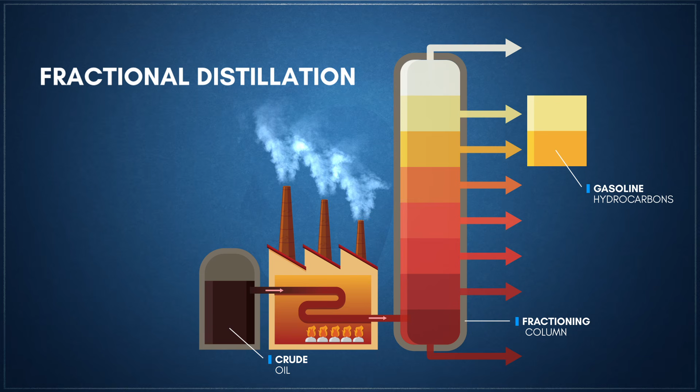In fact, the term gasoline was initially coined to describe distillate oils that vaporize into a gas easily. The term would soon find itself being used as a generic description for any volatile lighting oils. Both cazoline and gasoline were even contended trademarks for such products in the 1860s.

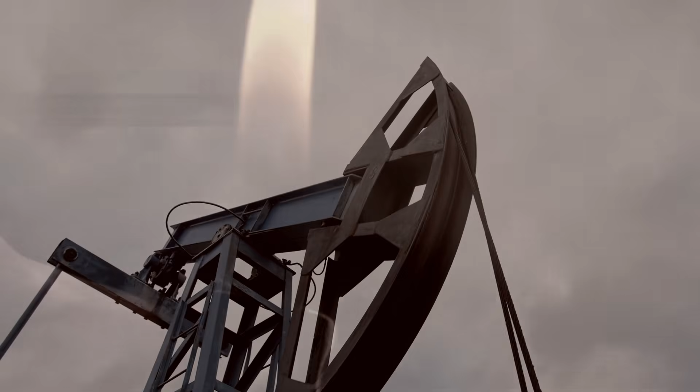Within a decade, the term petrol, short for refined petroleum, began to grow in popularity in British Commonwealth countries, with its first description in print as the material employed to run engines appearing in 1895.

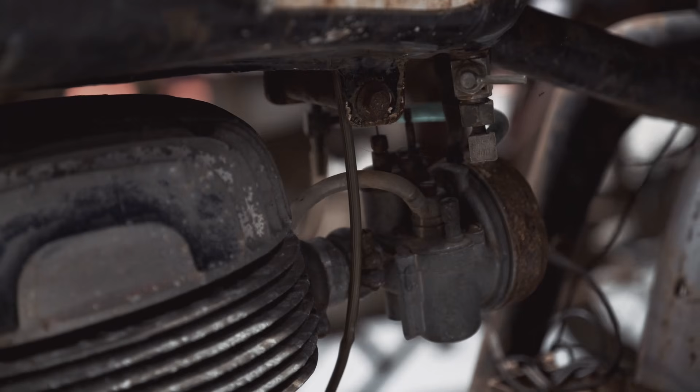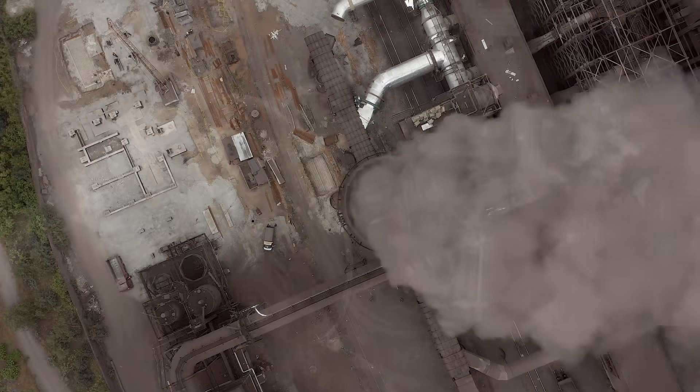In the 1880s, the development and subsequent success of the Otto cycle engine directly led to a demand for a volatile fuel source that could power them practically. Initially, coal gas, a gaseous mixture composed of hydrogen, methane, and carbon monoxide, produced by the continuous heating of coal in the absence of air, was used as a fuel source for early designs, though these engines would quickly be adapted to a more practical liquid fuel source using a carburetor.

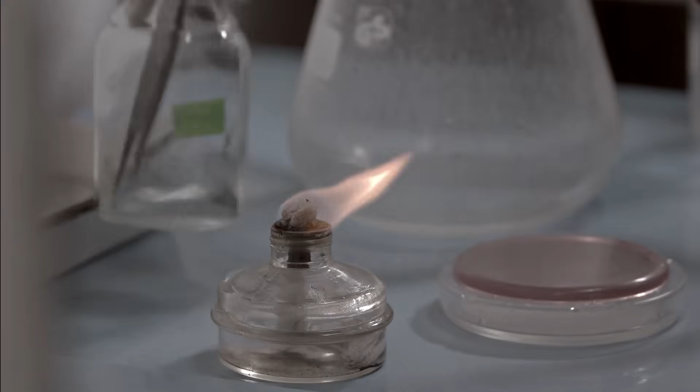These early surface carburetors relied on evaporation from the surface of the liquid fuel to form a combustible mixture with incoming air. For this to work efficiently, a volatile hydrocarbon fuel that would vaporize around the operating temperatures of the engine was needed. Gasoline would prove to be the ideal fuel for this.

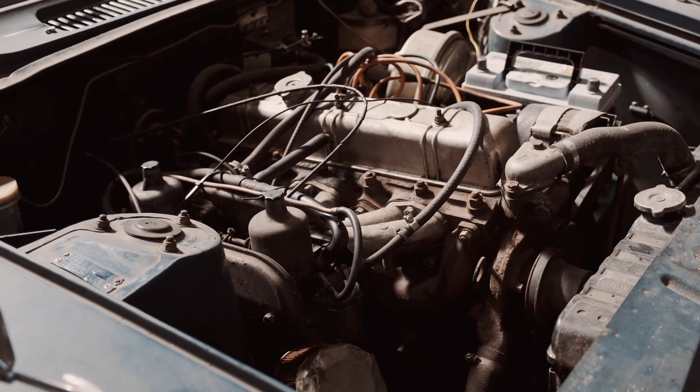By the 1890s, the introduction of the float-fed carburetor design, which used an atomizer nozzle, allowed for even more fueling flexibility. This made these engines far more reliable and robust, as they could now easily run on the loosely defined composition of early gasoline. Now intertwined with the success of the Otto cycle engine, this once useless byproduct of oil refining would now experience a huge surge in demand as the internal combustion engine became a foundational element of 20th century technological development.

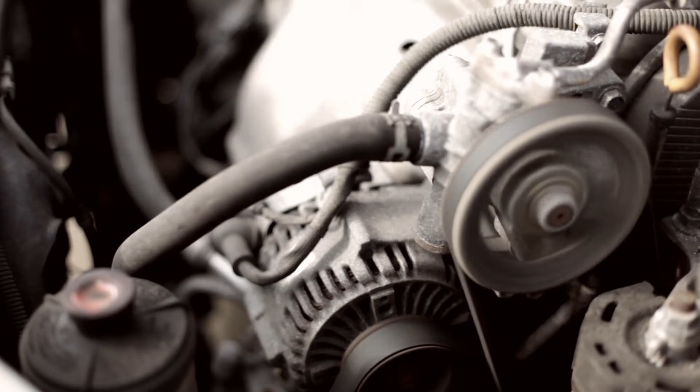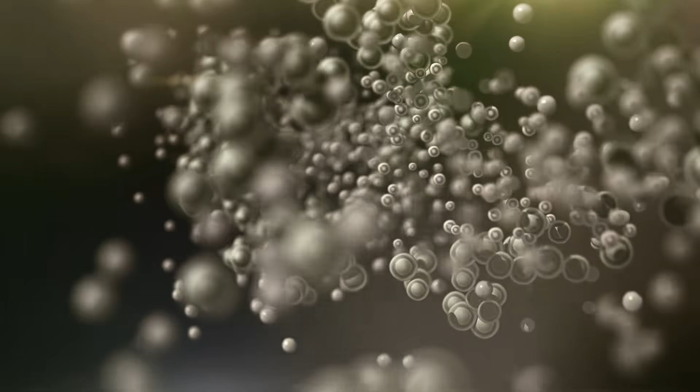Despite its public perception, gasoline is not a clearly defined compound, but rather a homogenous blend of light to medium molecular weight hydrocarbons, ranging from 4 to 12 carbon atoms per molecule. Its definition comes from its properties as a fuel, and its exact composition can vary based on the region of use, feedstock, and the processes used to create it.

The hydrocarbon types that commonly combine to form gasoline and contribute to its properties as a fuel are paraffins, olefins, naphthenes, and aromatics.

Paraffins, also known as alkanes, are the most prevalent hydrocarbons in gasoline. Alkanes are saturated hydrocarbons, meaning they do not have any double or triple bonds, and they contain relatively large reserves of energy. Examples of paraffins in gasoline are butane, pentane, and hexane.

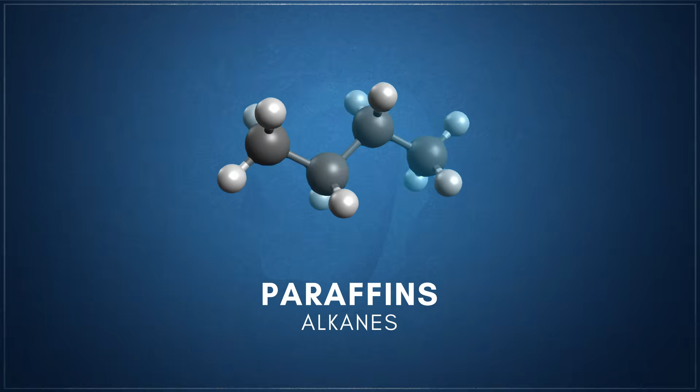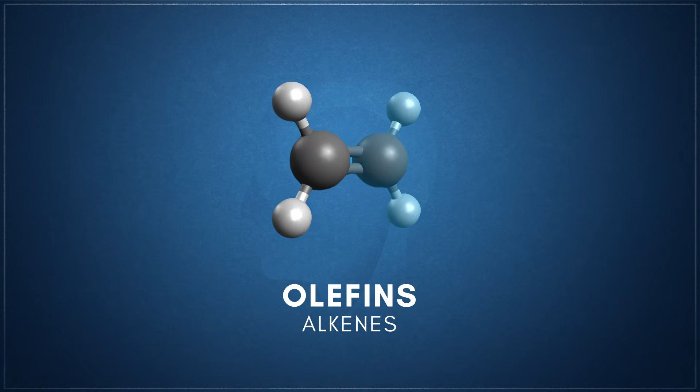Olefins, also known as alkenes, are hydrocarbons that contain at least one carbon-carbon double bond and are unsaturated, meaning they can react with other chemicals to form new compounds. Examples of olefins commonly found in gasoline include ethylene and propylene.

Naphthenes, also known as cycloalkanes, are hydrocarbons that contain one or more cycloalkane ring and are saturated.

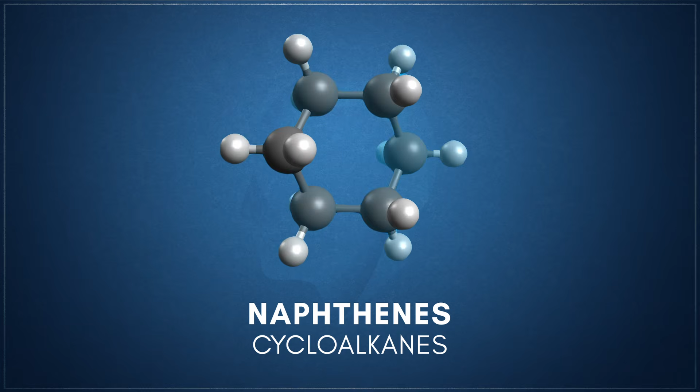Saturated hydrocarbons tend to be relatively inert and do not undergo additional reactions easily. Aromatics are unsaturated hydrocarbons that contain one or more aromatic rings, which are six-membered carbon rings with alternating double bonds. Common examples of aromatics found in gasoline include benzene, toluene, and xylene.

The relative proportions of these different types of hydrocarbons in gasoline have a significant impact on its properties, with octane rating and energy content being two key metrics. Depending on the blend, gasoline can vary anywhere from 32 to 36 megajoules per liter, with an octane rating that can vary from unusable for engine use to ratings designed for high compression performance and aviation engines.

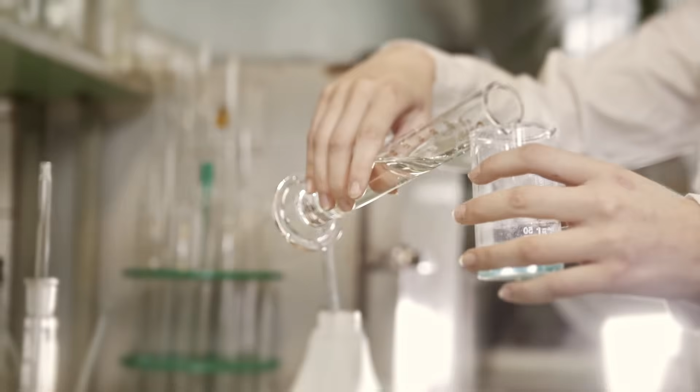Octane rating is a measure of a fuel's ability to resist knocking or pinging during combustion. This phenomenon is caused by the air-fuel mixture detonating prematurely within the engine and can cause engine damage, reduced power output, and increased emissions. This measurement system was originally developed based on the properties of isooctane, a hydrocarbon compound that is very resistant to knocking. Isooctane was assigned a rating of 100 as it provided the highest known level of knock resistance at the time.

Modern octane ratings are typically expressed in one of two forms: research octane number, or RON, and motor octane number, or MON. RON is a measure of a fuel's ability to resist knocking under mild driving conditions, while MON measures its resistance to knocking under more severe conditions, such as high engine speeds and loads. The two numbers are averaged to give the fuel's anti-knock index, or AKI, also known as the pump octane number, or PON, which is the number typically displayed on fuel pumps in the United States.

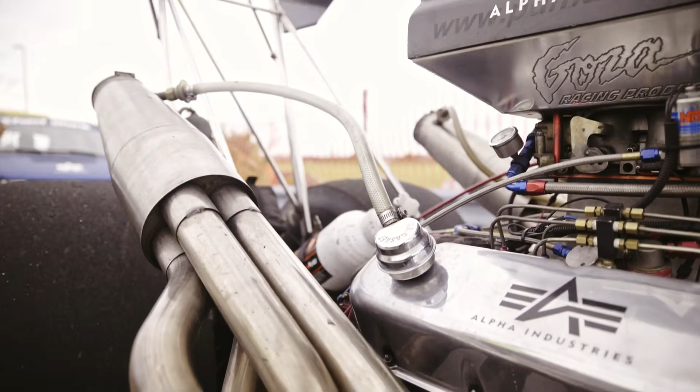The higher the octane rating, the more resistant the fuel is to knocking. Fuels with octane ratings as high as 115 to 150 MON are typically used in high-performance engines or engines with higher compression ratios, such as in aviation where the risk of knocking is greater.

Early gasoline produced directly from distillation was known as straight-run gasoline. Its composition varied wildly as the mixtures and ratios of the hydrocarbon blend produced was often unknown and highly dependent on the source of the crude oil and the specifics of the refining process used.

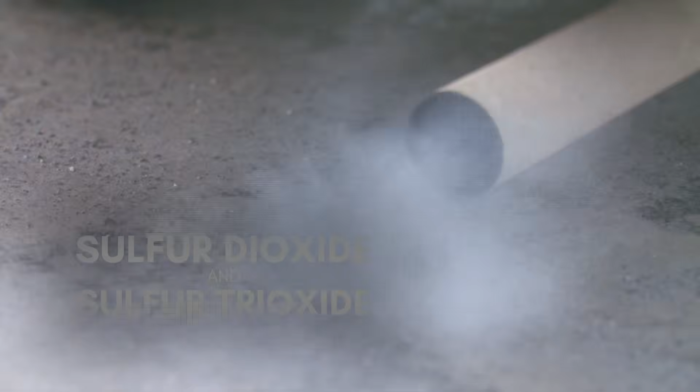These fuels were characterized by their higher proportion of naphthenes over other hydrocarbons, as well as higher amounts of sulfur and nitrogen. When gasoline containing sulfur is burned, it forms sulfur dioxide and sulfur trioxide, which creates deposits within an engine and are major contributors to air pollution, while the nitrogen-containing compounds produce nitrogen oxides when combusted, which are a major contributor to smog, acid rain, and ground-level ozone.

At the time, the effects of abnormal combustion and engine knock resistance were not yet established. A fuel's volatility via its boiling point was used as the primary metric of its performance. Early fuels that had relatively higher boiling points and overall lower volatility were known as high-test gasoline and were primarily used on aircraft engines.

These early gasoline blends by today's standards would be unusable in the higher compression engines of today, as even the most high-test blends would have an octane rating below 70, with lesser quality blends going as low as 40. By 1910, the rising demand for automobiles combined with the expansion of electrification created a flip in the product demands of the petroleum industry, with the need for gasoline now beginning to supersede that of kerosene.

In response to this supply problem, the industry looked to a technique known as thermal cracking to increase the yield of gasoline from the heavier hydrocarbons.

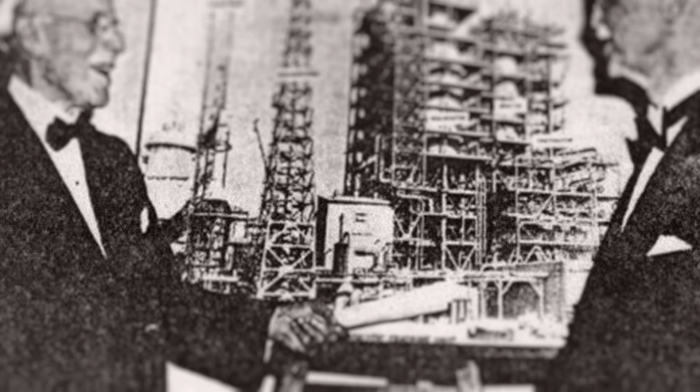First conceived by Russian engineers Vladimir Shukhov and Sergei Gavrilov in 1891, a variant of the technique would be developed by American engineers William Marion Burton and Robert E. Humphreys in 1908. Coined the Burton process, this technique thermally decomposed straight-run gasoline and heavier oils at temperatures between 370 and 400 degrees Celsius, or 700 to 750 degrees Fahrenheit, and under a pressure of around 620 kilopascals, or around 90 psi, cracking the heavier hydrocarbons and depleting their hydrogen to produce more lighter, hydrogen-rich hydrocarbons.

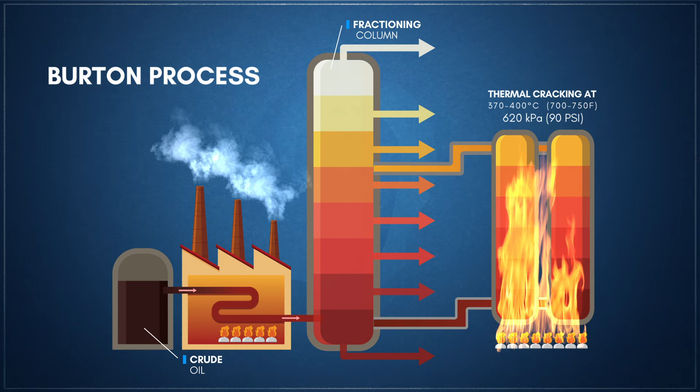This enabled refiners to produce cracked naphthas and other light oil products, which overall reduced the proportion of heavy oil produced during refining. As the First World War raged on, a troublesome issue emerged with the usage of gasoline in aviation.

The broad range of fuel volatility and octane ratings available posed a significant threat to aircraft engines, as they would produce unpredictable levels of power, risking the safety of early, power-sensitive planes during takeoff. Adding to this danger was the unavailability of consistent high-octane fuel, which limited engines to heavier, lower compression designs.

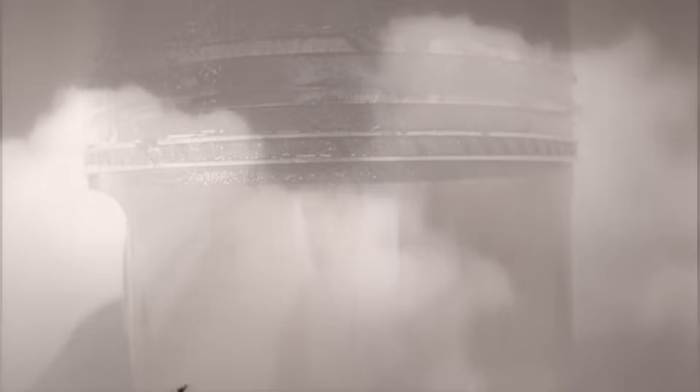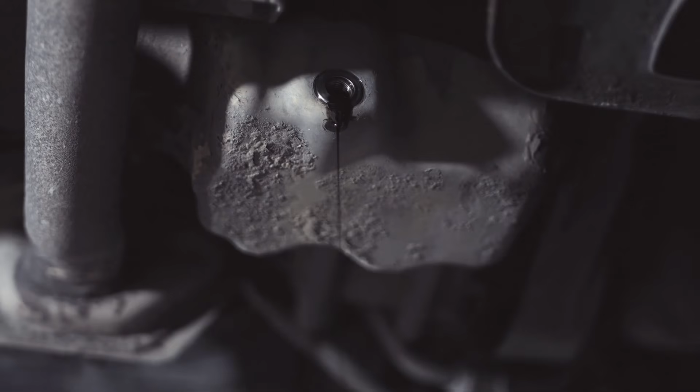The instability of fuel was also a concern, as the higher levels of unsaturated hydrocarbons produced by thermal cracking were reactive and prone to combining with impurities, resulting in gumming, further exacerbating the problem. Spark plug fouling and oil dilution was also occurring with thermally cracked gasoline due to volatility inconsistencies.

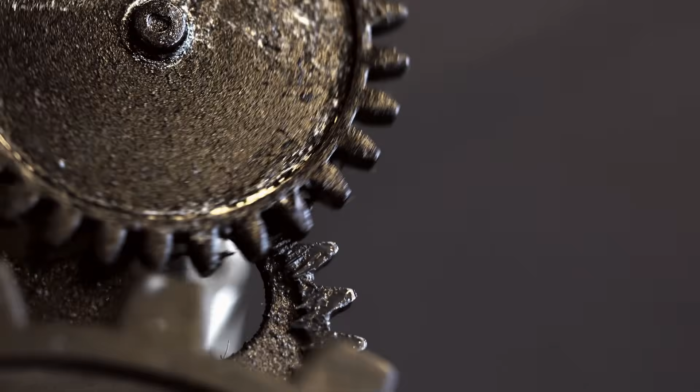This prompted the US Army to conduct research on gasoline properties and its effect on performance, with the results leading to the first US government specifications to be published for gasoline in 1922.

Designated as fighting and domestic grades for aviation and motor grades for automobiles, these specifications defined fuel grades by their boiling points, color, sulfur content, and susceptibility to gum formation.

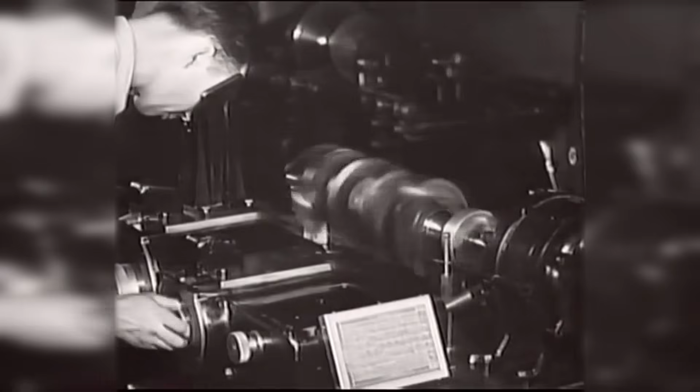Around this time, the automotive industry was increasingly growing dissatisfied with the oil industry's quality issues and began to conduct their own research into the effects of thermally cracked gasoline on abnormal combustion.

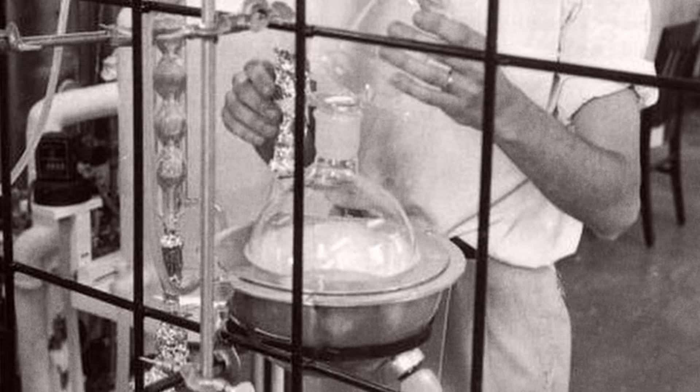In 1921, Charles F. Kettering of General Motors, upon investigating additives to improve fuel performance, ultimately looked towards tetraethyl lead as the solution. Tetraethyl lead was the product of research previously conducted by engineers Thomas Midgley Jr. and Thomas Boyd on abnormal combustion, and it would become the defining component of leaded gasoline.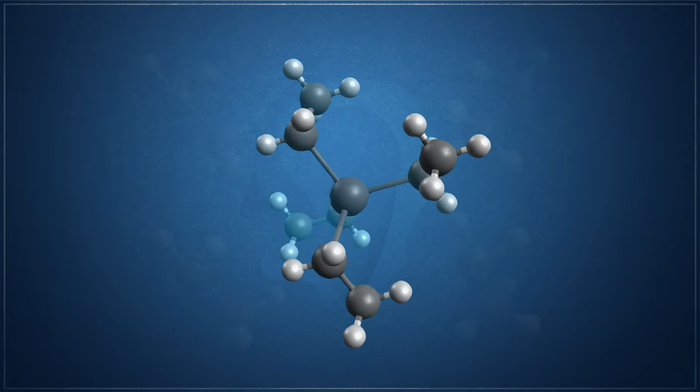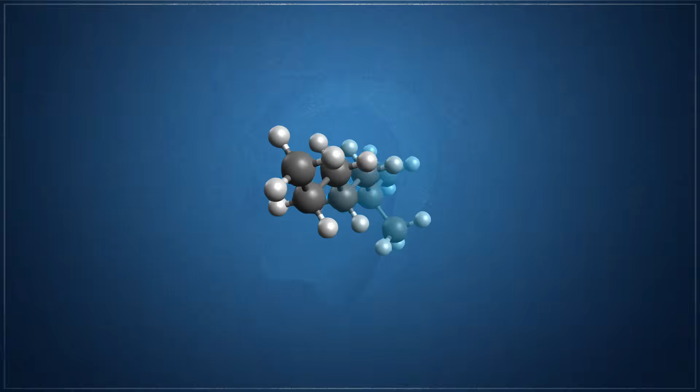When tetraethyl lead is added to gasoline, it dissociates into its component parts of lead ions and ethyl radicals. These ethyl radicals react with other gasoline molecules to form branched chain hydrocarbons that have a higher resistance to combust prematurely under pressure, effectively increasing the octane rating of the gasoline.

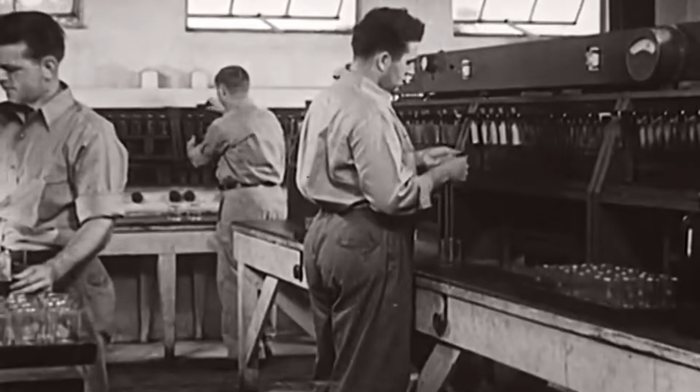Despite warnings about the dangers of leaded compounds, Kettering secured a patent for tetraethyl lead and would promote it. Even amid instances of lead poisoning among workers in production plants and a ban on sales in several areas, flawed industry-funded studies claiming that leaded gasoline was not a public health issue and was the only viable additive that prevented engine knocking without affecting fuel economy removed the barriers to its eventual mass adoption by the 1930s.

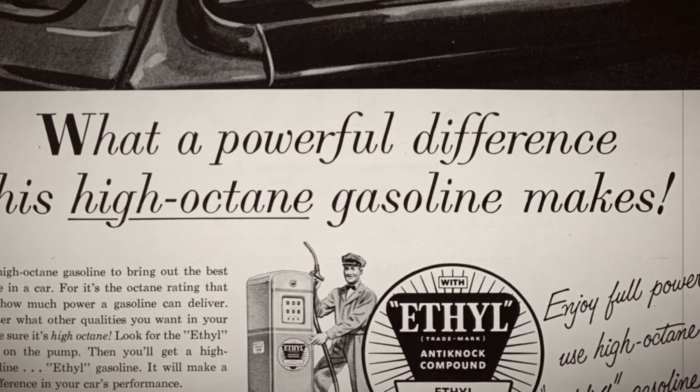In the early 1920s, Almer McAfee of the Gulf Refining Company would develop a new refining process that could potentially triple the gasoline yielded from crude oil by existing distillation methods.

Known as catalytic cracking, the process heats heavy hydrocarbon feedstock to a high temperature along with a catalyst in a reactor. The catalyst initiates a series of chemical reactions that break the hydrocarbon molecules apart into smaller fragments that are then further cracked and recombined to produce lighter, more desired hydrocarbons for gasoline.

Initially, the McAfee cracking process required anhydrous aluminum chloride, which proved to be prohibitively expensive for widespread use. By the early 1930s, French mechanical engineer Eugene Jules Houdry, backed by the Sun Oil Company, known today as Sunoco, would begin his own research into a commercially viable catalytic cracking process. In 1938, the Houdry process would be publicly introduced.

The Houdry process uses a fixed bed reactor filled with small beads of a catalyst, typically made of alumina or silica alumina. The heavy hydrocarbon feedstock is mixed with steam and passed over the catalyst bed at a temperature of around 538 degrees Celsius, or about 1,000 degrees Fahrenheit.

The high temperature and pressure causes the hydrocarbon molecules to break apart into smaller fragments, which then react with each other to form lighter hydrocarbons suitable for gasoline.

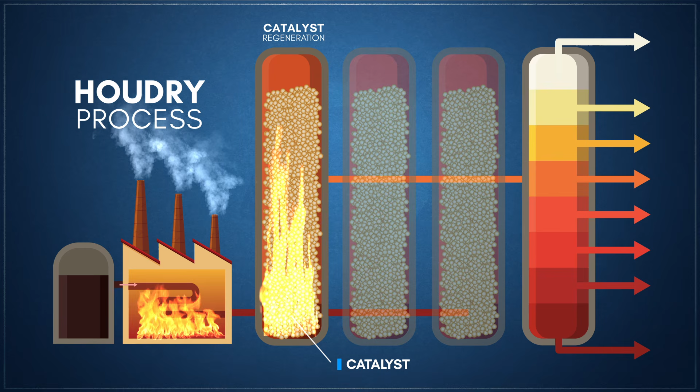Initially, the Houdry process operated in batches where refining and regeneration alternated. However, a technique called thermofor catalytic cracking would be developed that used a bucket conveyor elevator to move the catalyst from the regeneration kiln to the separate reactor section, creating a continuous operation.

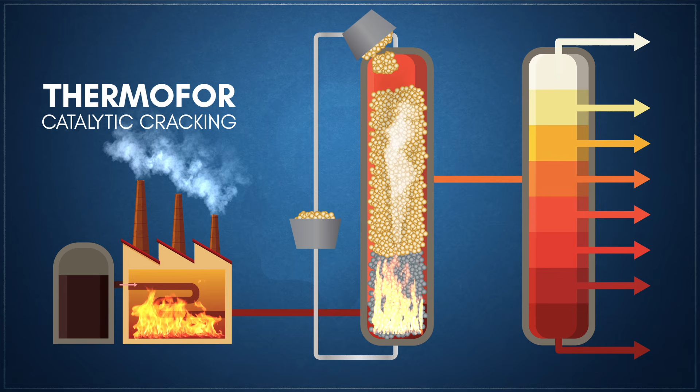Catalytic cracked gasoline had a significantly lower olefin content and more branched chain and aromatic hydrocarbons than thermally cracked gasoline, which raised its octane rating. The catalyzing action also produced a fuel with lower sulfur and nitrogen content.

The advent of catalytic cracking rendered thermal cracking obsolete, and over the next few decades, it would be completely phased out as a primary process.

It's speculated that the combination of the larger yield of the Houdry process, along with the higher octane ratings created by tetraethyl lead, were key factors in the winning of World War II, especially when it came to fueling the higher power aircraft engines towards the later years of the war.

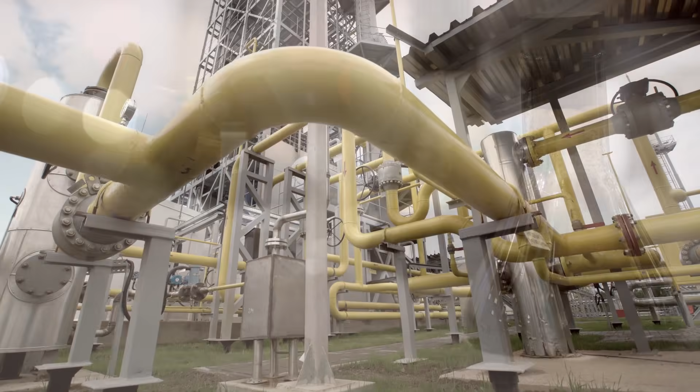In an attempt to circumvent Houdry's patents, Standard Oil began researching an alternative method to catalytic cracking, resulting in the development and fielding of the fluid-based catalytic cracking process in the early 1940s.

Initially conceived by Warren K. Lewis and Edwin R. Gilliland at the Massachusetts Institute of Technology, fluid catalytic cracking used a catalyst suspended in the form of fine particles within the reactor to improve the efficiency and effectiveness of the cracking process.

As the catalyst became deactivated by the buildup of carbon deposits caused by the cracking process, the spent catalyst is separated from the cracked hydrocarbon products and sent to a regeneration unit where the contaminants are burnt off, and the catalyst is reactivated for reuse. Fluid catalytic cracking allowed for better control over the reaction and produced a more consistent, higher yield of gasoline.

It was also continuous in nature and relatively easy to maintain. This efficiency and versatility would lead to fluid catalytic cracking becoming one of the most popular oil refining processes used today.

By the 1950s, as automobile engines continued to develop and become more powerful, the demand for higher octane gasoline grew. High quality control of gasoline production combined with an increase in the use of tetraethyl lead brought typical octane ratings up to around 70 to 80 RON, with premium grades reaching 90 to 95 RON or even higher in some cases. Additionally, the petroleum industry saw significant advances in catalytic reforming technologies that were first commercialized in the 1940s for increasing the octane rating of gasoline.

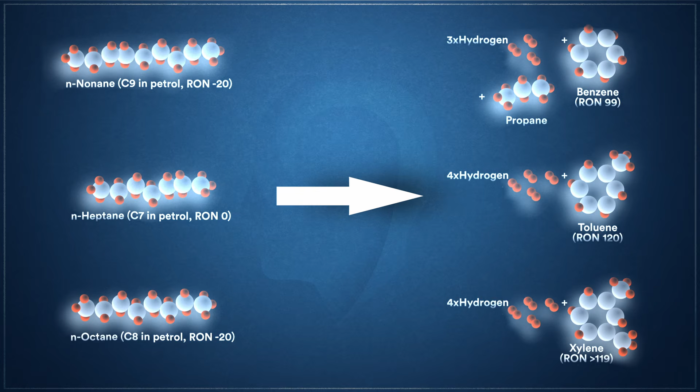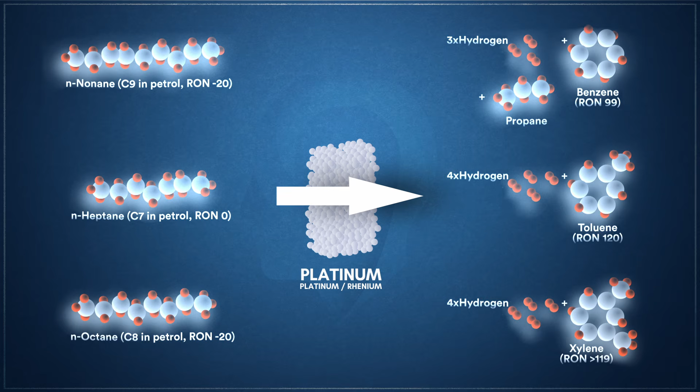Catalytic reforming works by converting low-octane naphtha into high-octane aromatic compounds such as benzene, toluene, and xylenes through the use of a catalyst, typically platinum or a platinum-rhenium combination, at elevated temperatures and pressures. The resultant reformate is then used as a blending component in gasoline to boost its octane rating.

The 1950s also saw the military's transition from piston to jet aircraft, reducing its demand for high-octane aviation gasoline in favor of kerosene-based jet fuels, realigning the focus of gasoline refining research to a much larger commercial scope.

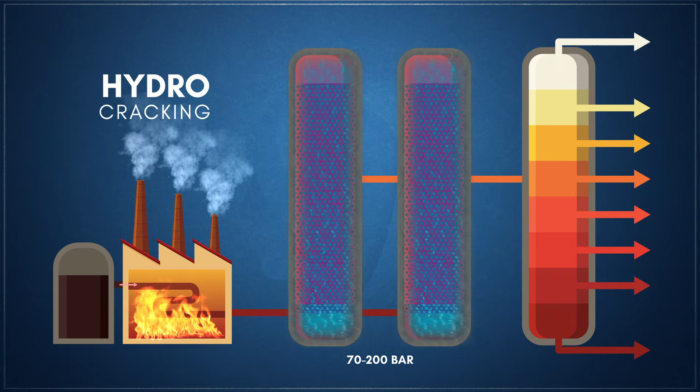During this time period, a new type of catalytic cracking process based on decades of research on hydrogenation, a reaction where hydrogen was used to break down large hydrocarbon molecules into smaller ones while adding hydrogen atoms to the resulting molecules, emerged. This research would yield a process known as hydrocracking, a technique that combines hydrogen and a catalyst under high pressure, usually between 70 to 200 bar, and high temperatures in the presence of hydrogen gas to break down large hydrocarbon molecules into smaller, more desirable ones.

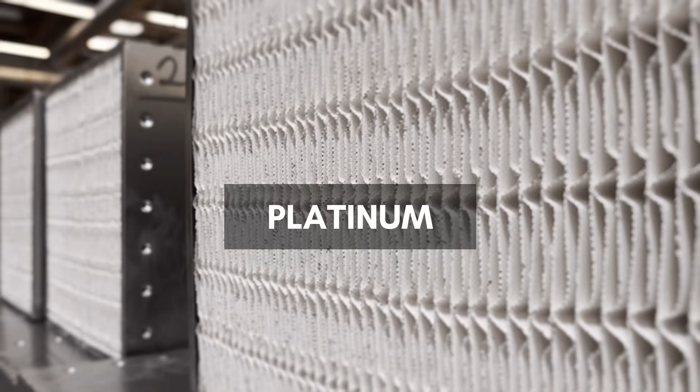The breakthrough that made this possible was the development of catalysts composed of metals like platinum, palladium, nickel, and molybdenum, supported on a solid material like alumina or silica, that made the process viable.

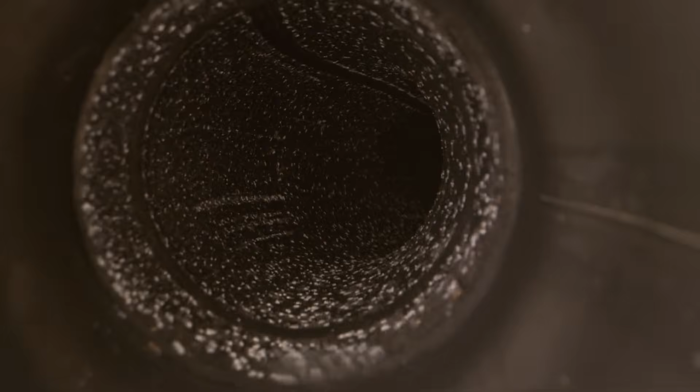Hydrocracking produced high-quality, cleaner-burning fuels with low sulfur and nitrogen content. It was very flexible, allowing for variations in the operating conditions and catalysts, while producing a high yield of gasoline from a wide range of feedstocks, including heavy oils and residues from other refining processes. Its efficiency at producing higher yields of gasoline from heavier oil products led to it being adopted on a commercial scale by refineries around the world during the 1960s.

Since its commercial adoption in the 1920s, the harmful effects of lead exposure from gasoline were becoming apparent, with studies linking atmospheric lead emissions to various health problems, including neurological damage, particularly in children. However, by 1970, the United States Environmental Protection Agency would be established, with one of its first tasks being to address the growing concerns about lead pollution.

That year, the second of two acts that formed the Clean Air Act would be passed, giving the EPA authority to regulate the use of lead additives in gasoline.

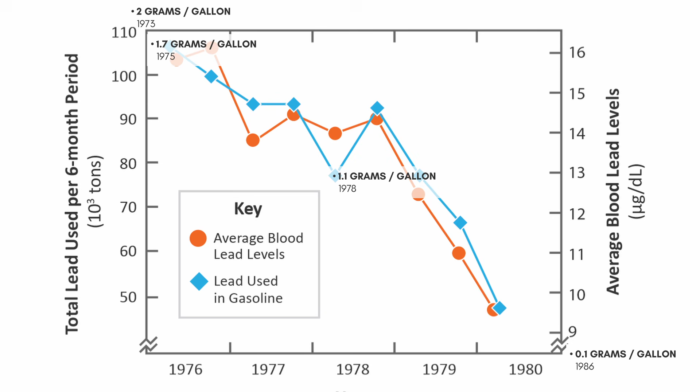Within 3 years, the EPA would introduce regulations to gradually reduce the amount of lead in gasoline in a phase-down process that started with a reduction of lead content to 2 grams per gallon in 1973, followed by further reductions to 1.7 grams per gallon in 1975, 1.1 grams per gallon in 1978, and finally 0.1 grams per gallon in 1986 for on-road vehicles. By the 1990s, the sale of leaded gasoline for road vehicles was effectively banned in the United States, with only a few exceptions for off-road use and aviation gasoline, though at only 0.05 grams per gallon.

Following the US's lead, many countries around the world implemented their own regulations to phase out leaded gasoline, and by the early 2000s, leaded gasoline was virtually eliminated in most developed countries. By 2021, Algeria, the last remaining country to use leaded gasoline, would end its use, finally completing the global elimination of leaded gasoline use for road vehicles.

After the phase-out of lead additives in gasoline, the petroleum industry had to find alternative ways to maintain and improve the octane rating of gasoline. One class of additives, called oxygenates, became a popular solution. Oxygenates are oxygen-containing hydrocarbons that promote more complete fuel burning within the engine, while also increasing the resistance of the fuel to auto-ignition, improving engine performance. When blended with lower octane gasoline, they dilute the lower octane components, increasing the overall octane rating.

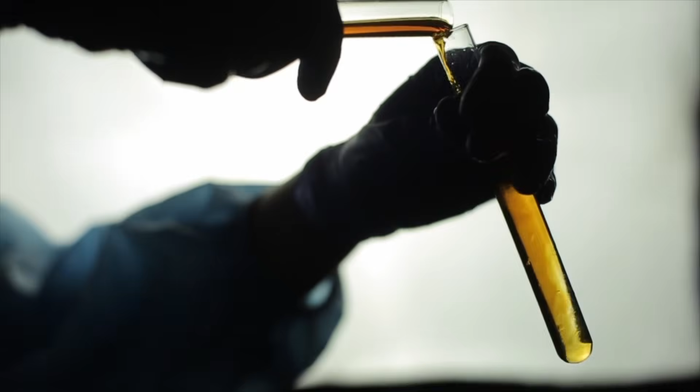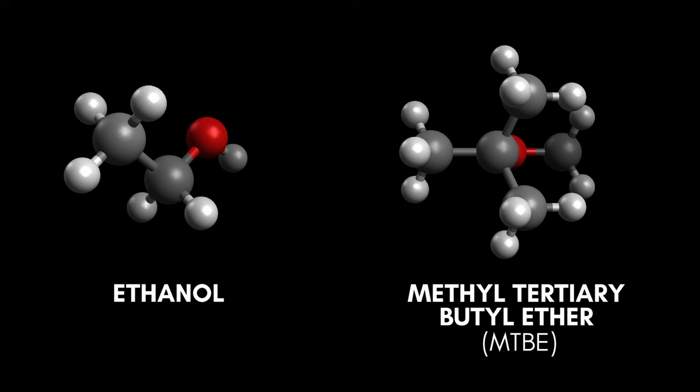The primary oxygenate types used are alcohols and ethers, with ethanol and methyl tertiary butyl ether, or MTBE, being the most popular choices. MTBE in particular, which was derived from natural gas and had an octane rating of 110, played a significant role in the phase-out of lead additives in gasoline. However, MTBE use had declined significantly over the past two decades due to environmental concerns.

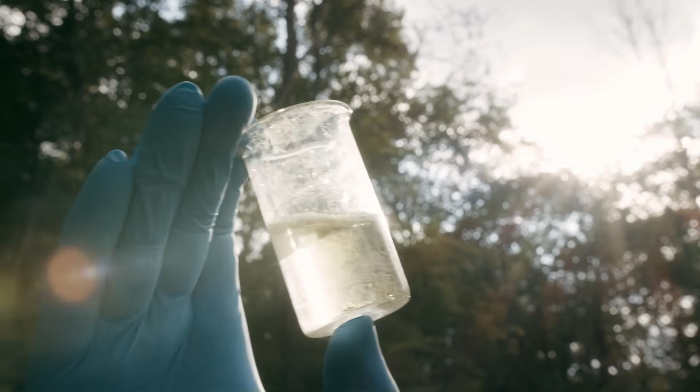Its high solubility in water leads to leaks from underground storage tanks and gasoline spills, causing contamination of groundwater sources, affecting the taste and odor of drinking water. Ingesting water with high concentrations of MTBE can also cause adverse health effects, such as headaches, nausea, and irritation of the respiratory system.

The phase-out of MTBE led to ethanol becoming the primary oxygenate and octane booster in gasoline by the early 2000s. At an octane rating of 109 RON, ethanol is typically blended with gasoline in varying proportions.

In the United States, the most common blend is E10, which contains up to 10% ethanol and is compatible with most gasoline-powered vehicles. E15, containing up to 15% ethanol, is generally compatible with most vehicles made within the last 20 years. Flexible fuel vehicles can run on gasoline with higher ethanol content, such as E85, which contains up to 85% ethanol.

Ethanol is produced from renewable biomass sources, which helps reduce reliance on non-renewable fossil fuels. In concept, the use of ethanol in gasoline can help reduce greenhouse gas emissions, as the plants used to produce ethanol absorb carbon dioxide during their growth. It also promotes the agricultural sector, creating jobs and encouraging investment in the biofuel industry, though there are concerns about its potential impact on food prices due to competition.

Beyond additives, the process of alkylation also grew in its use to boost octane ratings. This technique is used to produce alkylates, a high-octane blending component for gasoline. Alkylation starts with mainly isobutane and light olefins obtained from other refining processes. They're first treated to remove impurities such as sulfur, nitrogen, and water, then mixed with the acid catalyst and fed into an alkylation reactor.

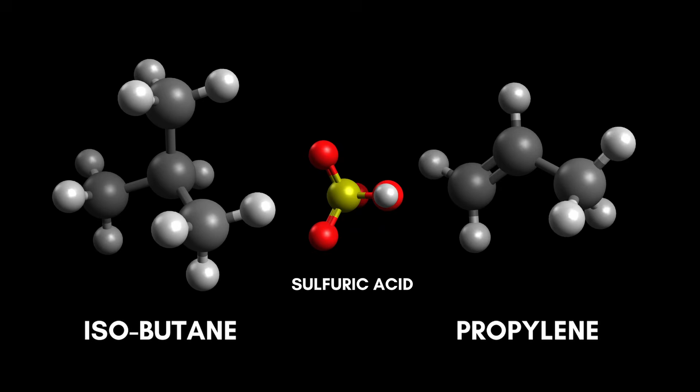In the reactor, the olefinic hydrocarbons react with isobutane to form larger, branched alkylated hydrocarbons. Much like other catalytic processes, the acid catalyst is separated and recycled, while the alkylates are separated and unreacted isobutane recycled. The high-octane alkylates is then blended with other gasoline components.

Another similar catalytic technique that began to grow in popularity is gasoline isomerization. This process typically focuses on the conversion of low-octane straight-chained paraffins found in light naphtha into branched-chained hydrocarbons that have a higher octane rating. Much like with alkylation, the feedstock is first treated to remove impurities such as sulfur, nitrogen, and water. Then it is mixed with hydrogen and passed through a fixed bed reactor containing a catalyst at moderate temperatures and pressures.

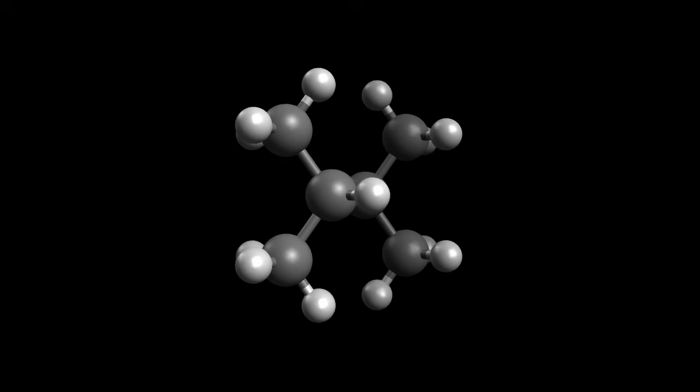In the reactor, the straight-chained paraffins react with the catalyst to form their branched-chained isomers. These isomers are then separated from the unreacted feedstock and byproducts, and are then blended with other gasoline components to produce a final gasoline product with a higher octane rating.

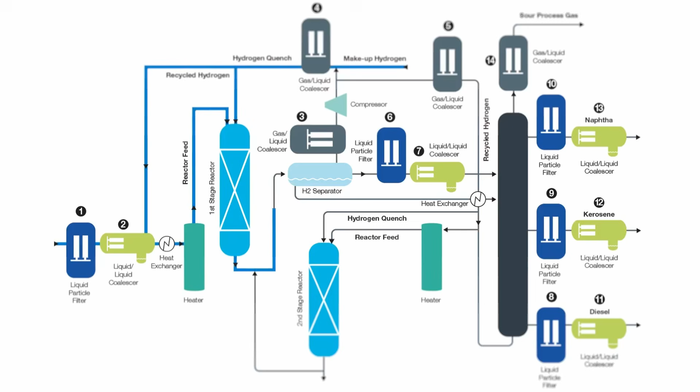Today, gasoline production is based on a complex combination of refining processes that focus on cleaner, more environmentally friendly fuels. Modern refineries employ a variety of refining sequences that combine catalytic reforming, alkylation, hydrocracking, and isomerization to produce high-octane gasoline components that must not only meet increasingly stringent emission standards and performance requirements, but also work well within the seasonal climate of the target region of consumption, as well as meet anticipated consumer demand.

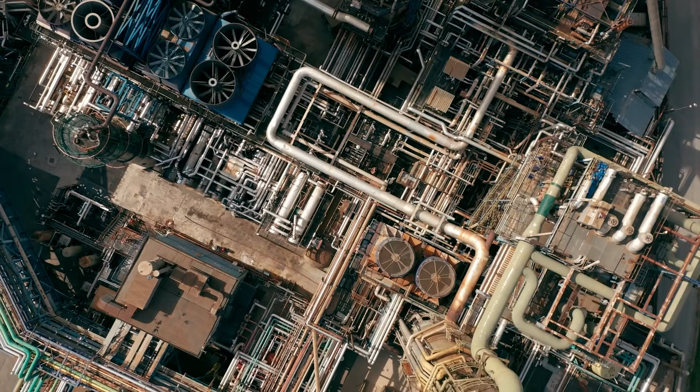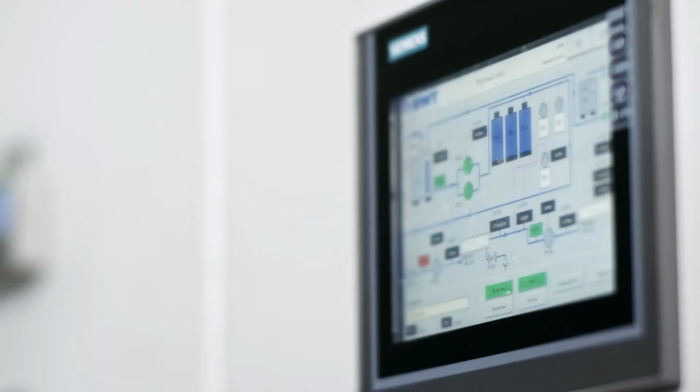While modern petroleum refining is fundamentally based in organic chemistry, the operation of the industrial processes that perform each stage of the requisite reactions are controlled by industrial electromechanical technologies. These systems must both perform the needed instrumentation and automate the entire refining sequence, with algorithms driving the entire process.